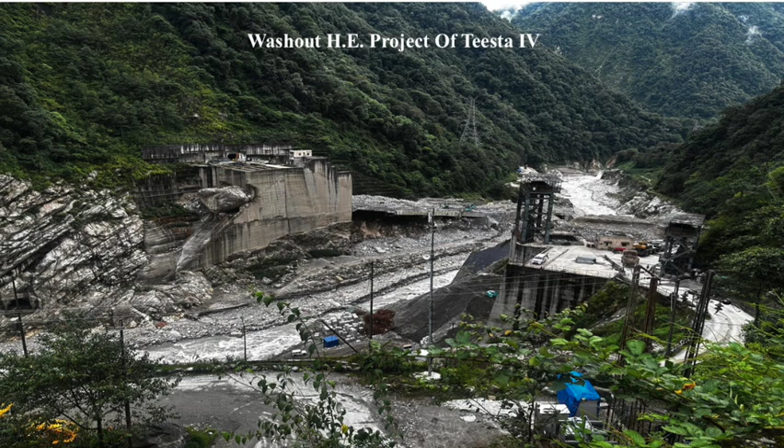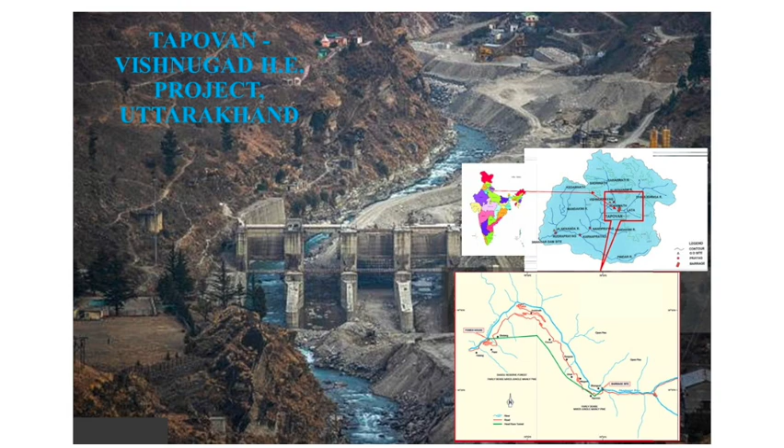Climate change has accelerated glacier melt and altered rainfall patterns. Hence, hydropower development is even more challenging in the Himalayas. Among the major projects here is the Tapovan Vishnugad Hydroelectric Project, a 520 megawatt run-of-the-river scheme on the Dhauli-Ganga River. It plays a key role in harnessing Himalayan hydropower potential and supporting India's renewable energy grid.

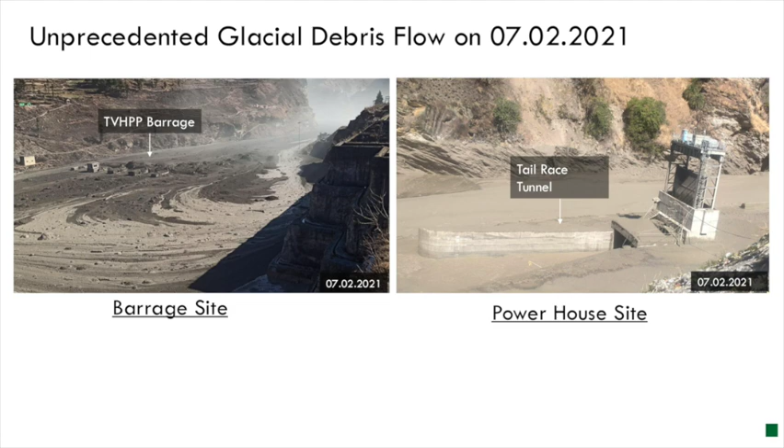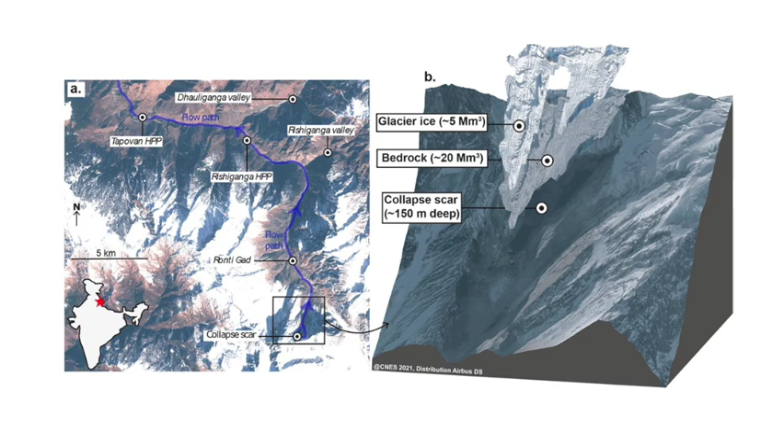The 2021 Chamoli disaster. On 7 February 2021, a massive rock ice avalanche from Ronti Peak triggered a devastating debris flow in the Dhauli-Ganga Valley. Around 27 million cubic meters of rock and ice surged downstream, completely washing away the Rishi Ganga project and severely damaging the Tapovan Vishnugad project under construction. Very large boulders were transported and valley walls were scarred.

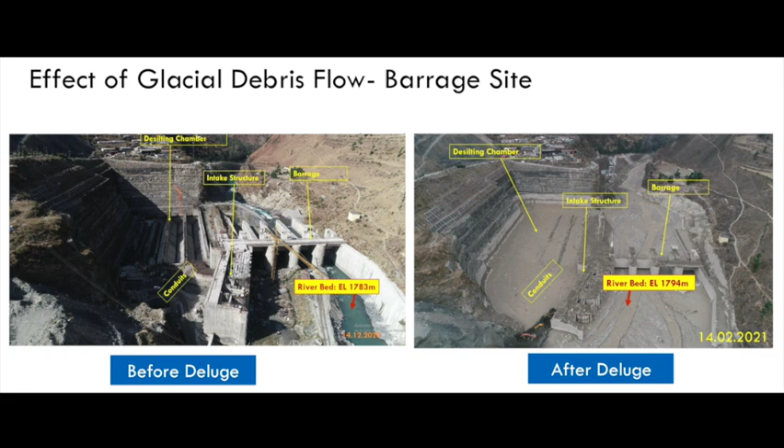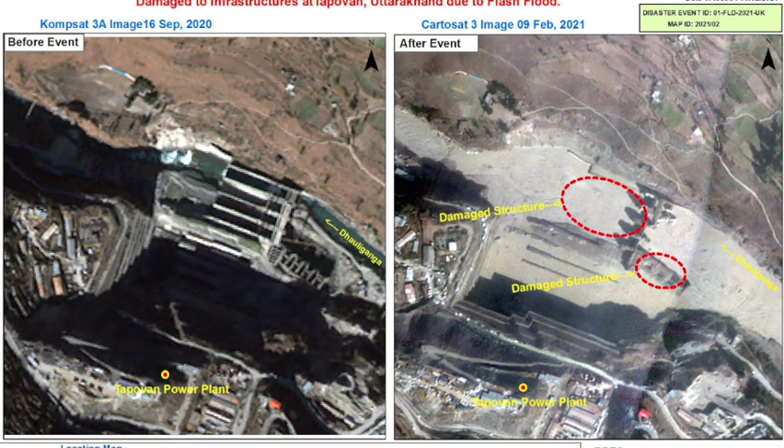Post-flood studies revealed major geomorphological changes caused by sediment deposition and channel bed adjustment. The event was not a glacial lake outburst but a rock ice avalanche. The event emphasized that Himalayan project planning must consider all hazards, including avalanches, debris flows, and GLOFs, especially under changing climatic conditions.

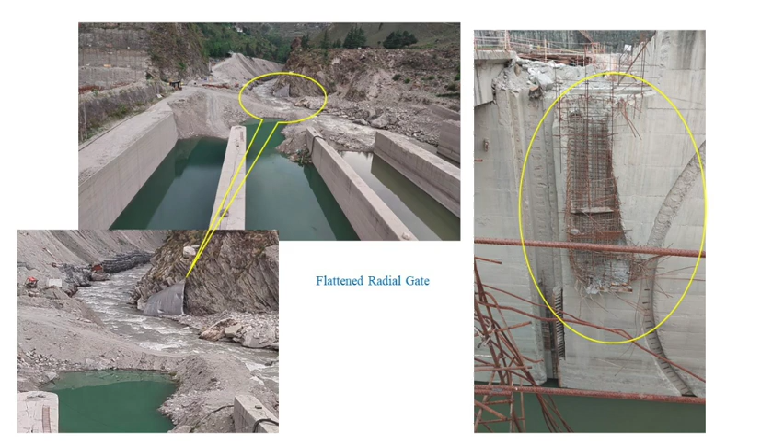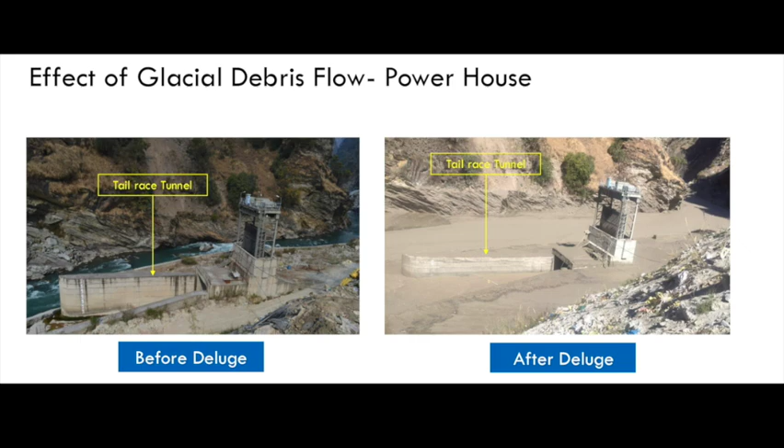Photographs showed extreme damage at the barrage, where radial gates were displaced and flattened. Upstream bed levels rose by about 11 meters. While the project's structure remained stable, restoring its hydraulic performance became the key challenge. For this, NTPC referred the studies to Central Water and Power Research Station, Pune.

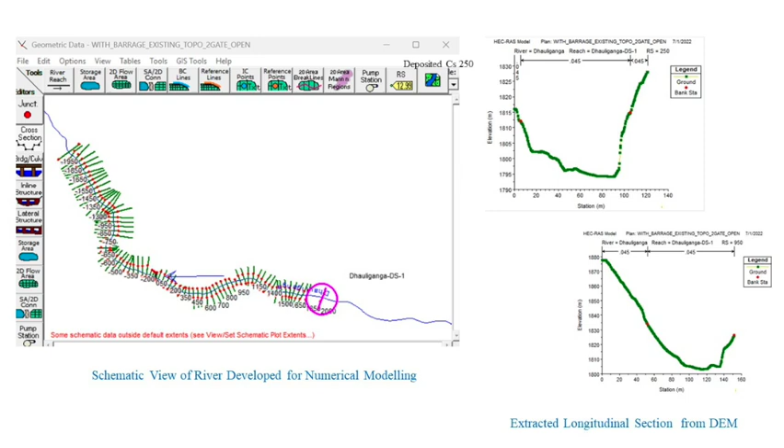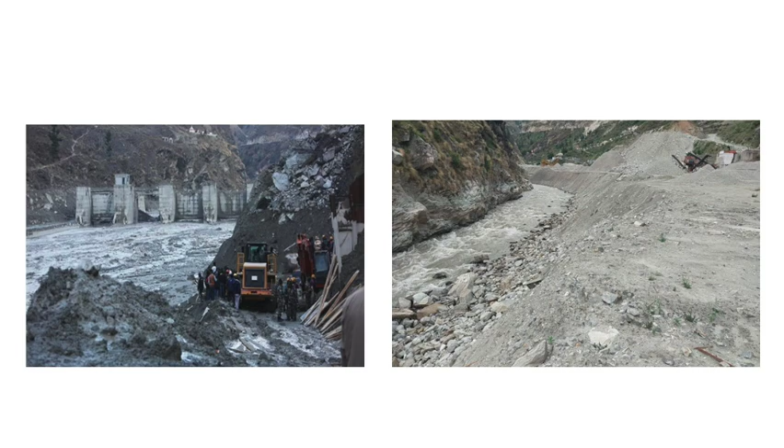Hydraulic Model Studies. Considering the urgency of studies with the approaching monsoon, CWPRS carried out mathematical modeling using HEC-RAS mathematical software to check if the annual flood could pass through the silted-up river. High-resolution point cloud survey data supplied by NTPC was used in the studies. Results showed that after local dredging near the right abutment, the annual flood could safely pass below the high flood level.

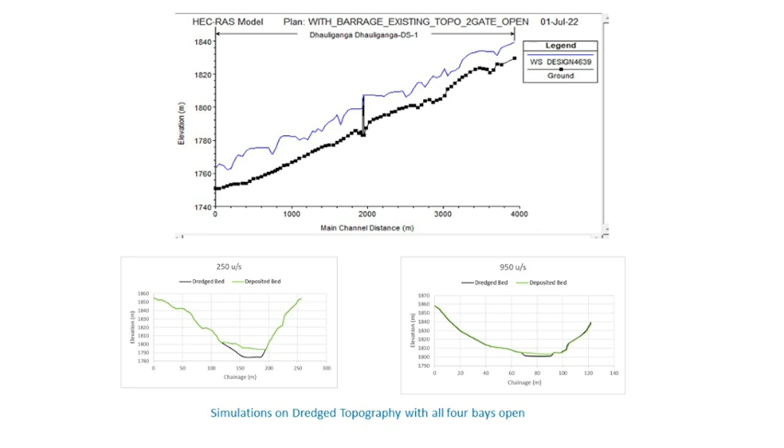Further simulations confirmed that the design discharge couldn't pass unless dredging was done. Various trials for dredging were taken, and it was observed that about 0.34 million cubic meters of sediment removal was needed to restore flow capacity. Simulations with this updated terrain indicated that design discharge could be passed safely. The updated digital terrain was prepared from the dredged geometry, which was used to compute new area elevation capacity curves and predict future sediment deposition.

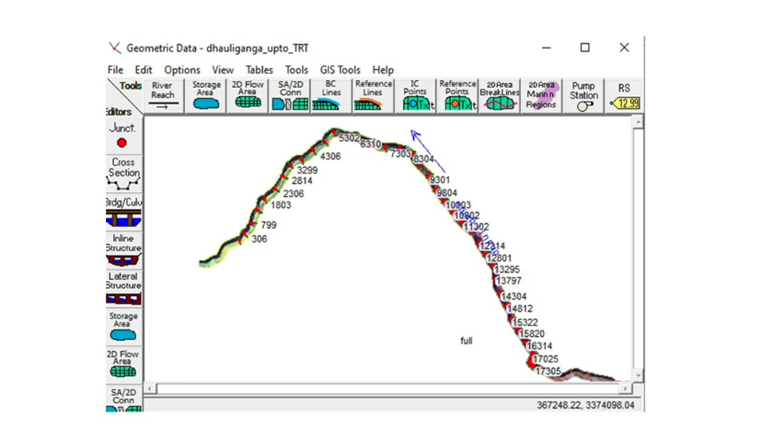A numerical model covering 18 kilometers downstream was also prepared, simulating discharges ranging from 100 to 4,639 cumecs for generation of stage discharge curve at tail race tunnel and inundation profiles for project authorities.

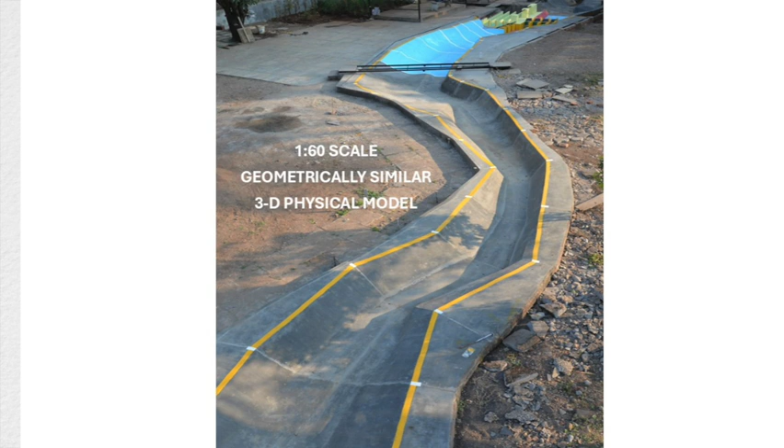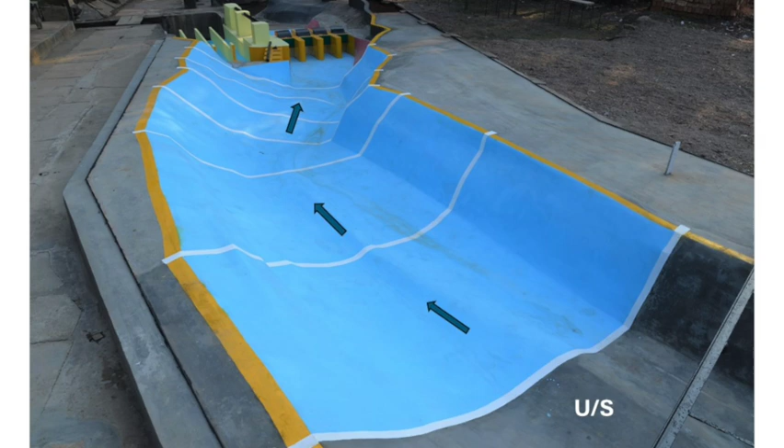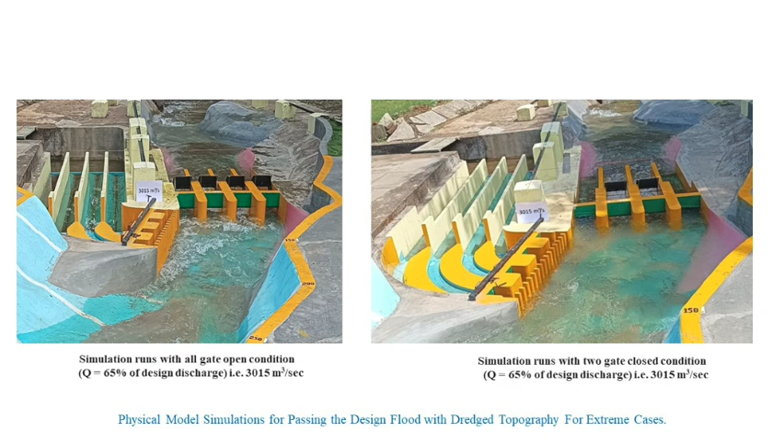Physical model studies. One-dimensional model can't reproduce the complex flow in steep terrain, hence, CWPRS built a three-dimensional physical model at 1:60 geometrically similar scale using the dredged topography. It covered 1.7 km upstream and 0.5 km downstream, including the barrage, stilling basin, and open desilting basin. Simulations confirmed that the design discharge can safely pass under all gate conditions, all open, one closed, or even 65% discharge with two gates closed. Thus, the spillway capacity was found to be adequate under all worst or extreme conditions.

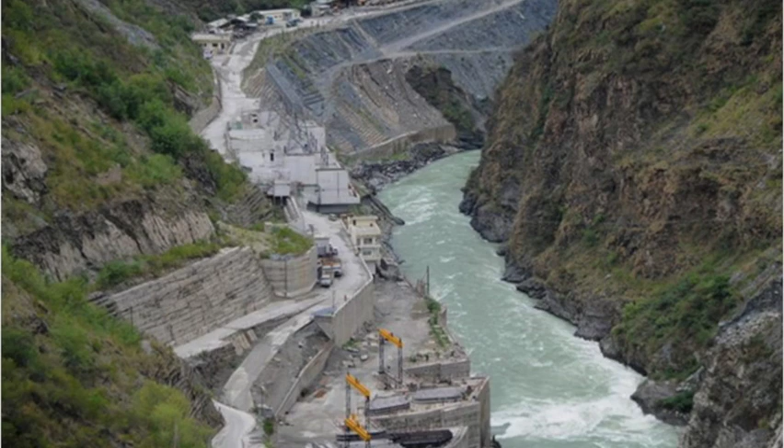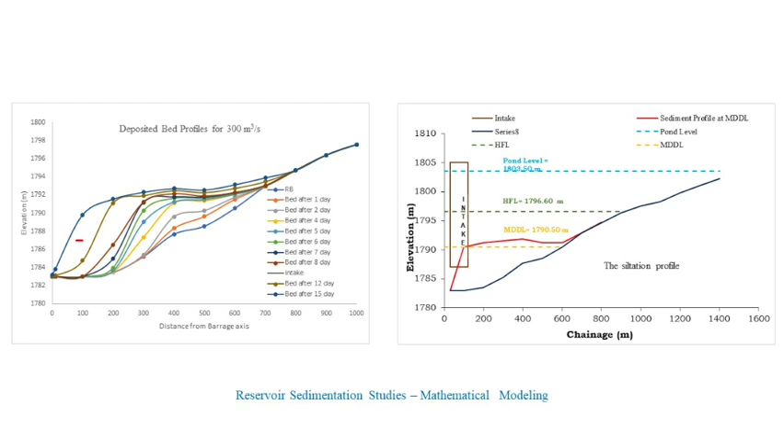Sedimentation and flushing studies. Being a run-of-river project, Tapovan Vishnugad has limited storage but high sediment inflow. Numerical studies were carried out to analyze how quickly the reservoir fills under various discharges. It was observed that for discharge of 300 cumecs, sediment reaches up to intake invert in 15 days. To restore capacity and safeguard turbines, drawdown flushing was proposed.

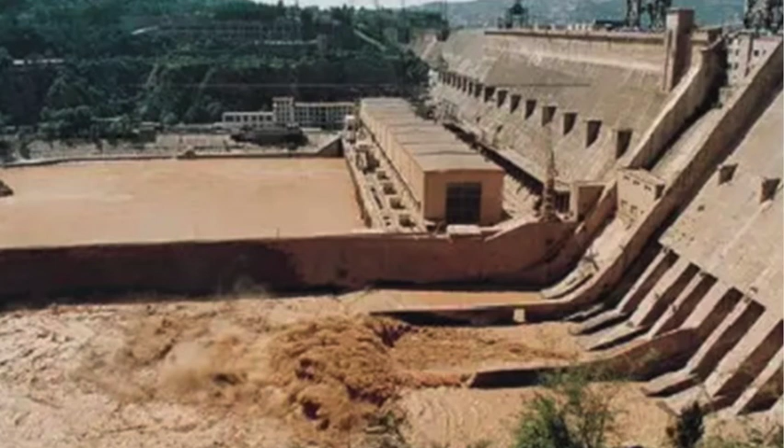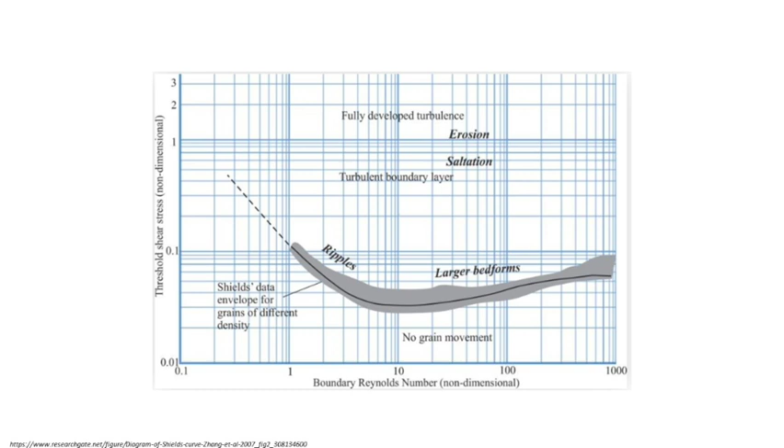Since sediment transport is a complex three-dimensional process, flushing studies were performed on a three-dimensional physical model. Sediment scaling was done by using Shields and Yang's incipient motion criteria, and based on this it was found that silt of 0.23 mm diameter is required to reproduce equivalent D50 of prototype.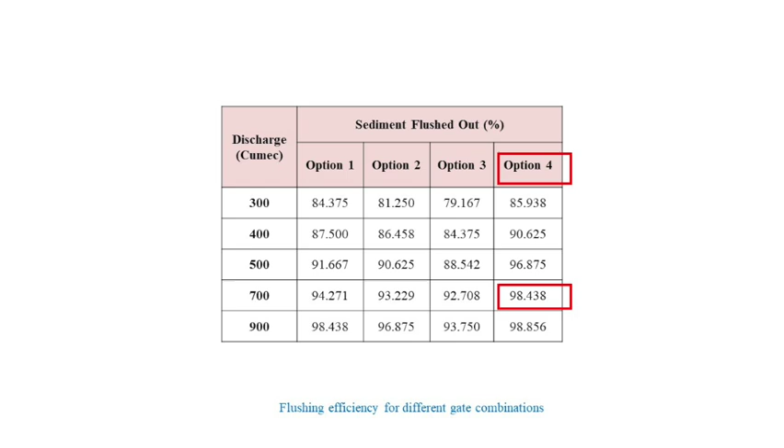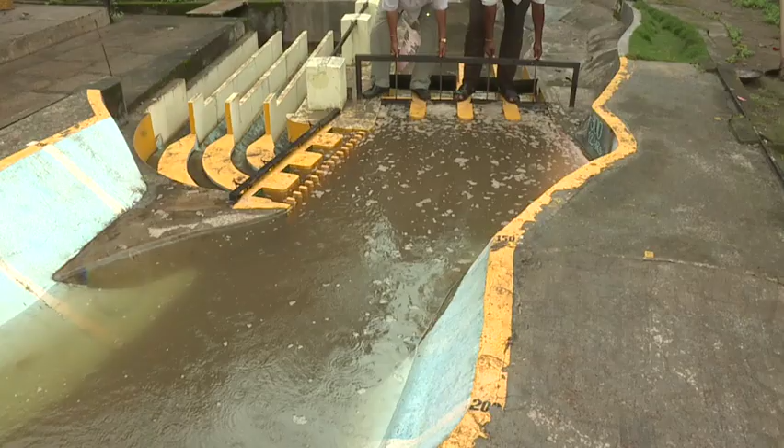The best result, where nearly 99% silt removal occurred, was obtained for option 4 as shown in figure, when all gates were open for the first 6 hours, then gates 1 and 2 for 3 hours, followed by gates 3 and 4 for the next 3 hours. These are the actual model photographs for best option 4.

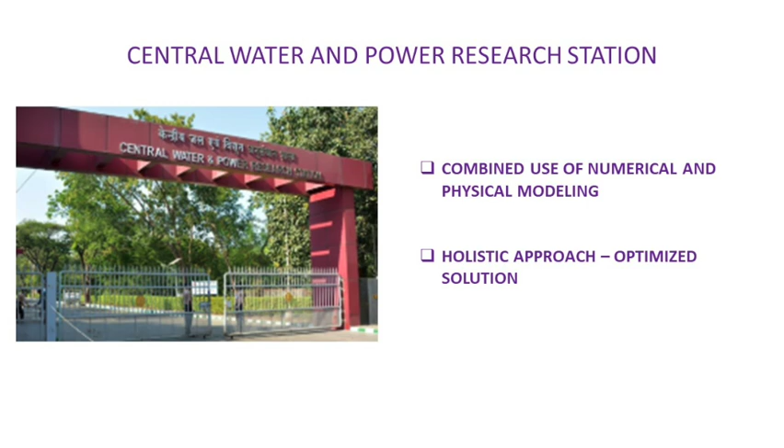Through the combined use of numerical and physical modeling, CWPRS provided an optimized solution for flood passage, sediment management, and hydraulic restoration. With decades of experience and more than 40 Himalayan project studies, CWPRS remains India's premier institute for hydraulic and sediment management research in complex mountain terrains.